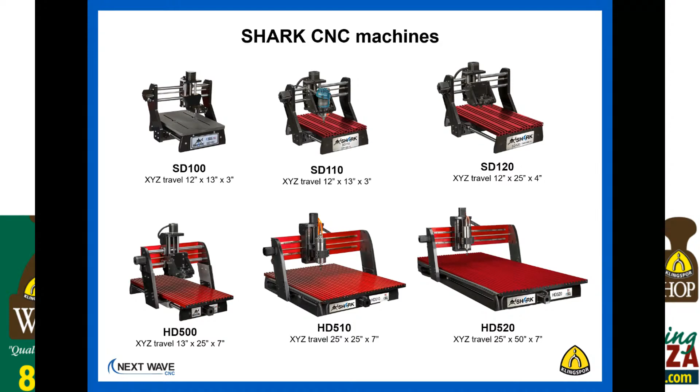That's one number you do want to pay close attention to, because especially if you start getting into cutting things like 8/4 material, you need room for your router bit and the material to fit underneath. And then, of course, if you have what's called a spoil board or a board underneath your work, so you don't cut into the metal bed, you need additional space for that. So just a little bit of advice there.

When you're out shopping, make sure you get something with, I'd say at a minimum, 4 inches if you're looking at a larger tool. For the smaller tools, 3 or 4 inches works okay, because typically you're just doing some small sign cutting right on the bed. I've actually worked with people who run a very small machine because all they're doing is small parts, maybe little coasters or handles or something like that. Surprisingly, the small machine performs well for them. But as soon as you start getting into cutting plywood parts or larger parts, obviously a larger machine makes sense.

So this is something I like to give to people who are looking for a machine, or new owners, just an overview of the basic anatomy of the machine. CNCs, the kind that most of us are going to be familiar with, are referred to as a 3-axis CNC, because there are 3 directions of movement, as spelled out here. So when you get into CNC, you're going to see a lot of references to X, Y, Z. You get very familiar with those movement directions.

The Z is common on all machines; that is the spindle or router movement. Whereas the X and Y, it depends on the machine manufacturer—there's not a standard layout for that. So in the machine you see here, the Shark 510, the Y is the forward-to-back movement, where the X is the left and right. But again, that depends on how the manufacturer decides to lay that out.

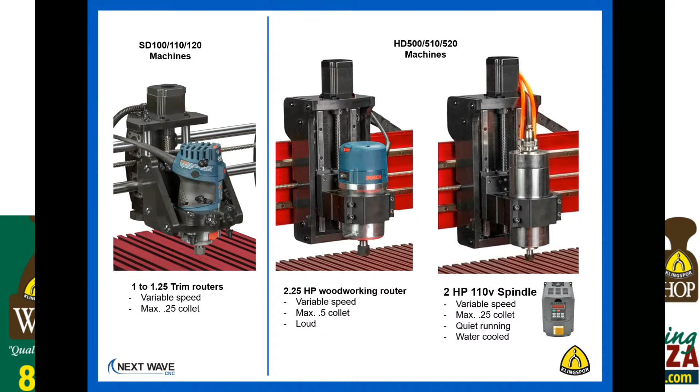With Next Wave's Shark machines, and many other machines on the market, you have the option of running your machine with a PC or with a pendant. The Shark machines offer both options, and each has certain advantages. The pendant is incredibly handy because you hold it in your hand and have all the essential functions there. I probably use that 80% of the time.

The computer control option, because you're controlling it directly with the computer, gives you a bit more brain power, so to speak, and lets you do a few more things. But the downside is you're taking your PC or computer into the shop, where it's dusty, so some people don't like to do that.

Just a quick side note, most CNCs can be run with either a PC or a Mac. However, if you run a Mac, you have to get another program often referred to as a virtual desktop—one brand is called Parallels—which allows you to run Windows and Windows-based programs on your Mac. I run both and have had great success running my Mac or the PC with my machine. So if you're a Mac user, there are definitely options out there, and if you want more information, just drop me an email and I'll send you a link on how to set that up.

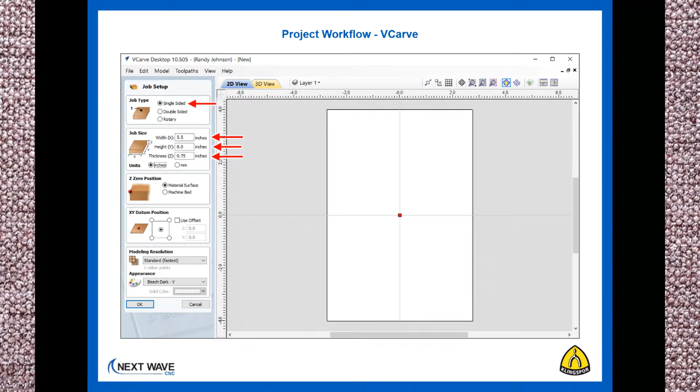Some of the important settings involve how you calibrate your machine. You heard me mention the Z movement—that has to do with the bit cutting into the wood. One of the settings in V-Carve is referred to as the Z0 position, because you have to coordinate or calibrate your machine with what you have in your software program. In this case, we're setting this up so the router bit will calibrate itself to the top of the material, which is called the Z0 position.

Next, you also have to calibrate the XY axes, referred to as the XY datum position or the XY0 position. For this project, we're going to select the middle of the material, but you could select any of the four corners or other locations as well. The middle is a very simple place to start out. Simply click OK, and your initial setups are done.

Again, a quick overview of what V-Carve looks like for those of you who are brand new to CNC or considering it. V-Carve basically has three areas you have to be concerned about: the left area, which is your design area; the right area, which is your toolpath area; and the middle area, which is your project drawing or setup area. There are some other aspects to that, but those are the broad areas you're going to be working in when you're starting out.

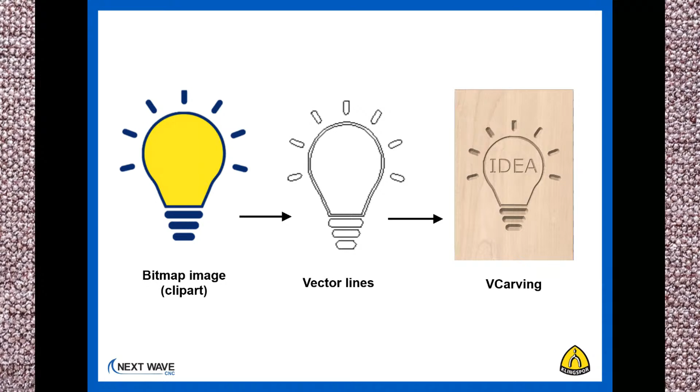For this project, I'm going to start out with a bitmap image or clip art. It's simply a photograph or a drawing that you have on your computer, which you can get off the internet in lots of ways. The CNC, or V-Carve, can't cut directly from that bitmap image. You need to convert it to what are called vector lines, which is the kind of line that allows the tool bit and the tool path to follow to do the cutting. Then from there, you're able to save out your actual tool path and do the actual cutting on the machine.

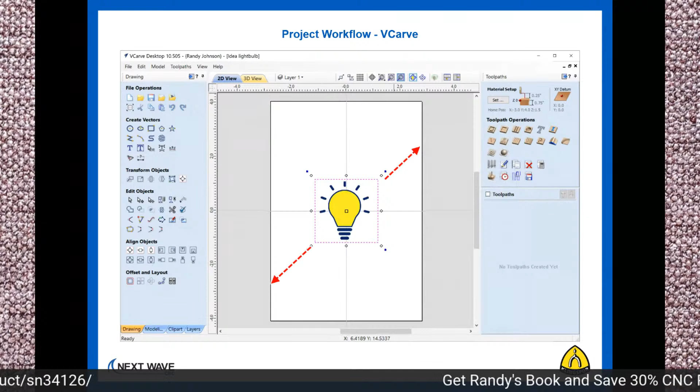So again, for this one, we're going to use that little import function. I'm going to go back to the routine of importing the light bulb image from our computer using the import function in V-Carve. When you bring it in, you can stretch out that image to whatever size you want to fit your drawing area. Then, as I mentioned, there's a tool called Trace Bitmap. When you bring that up, it will automatically recognize the image. You can see that this image is made up of two colors primarily, the blue and the yellow.

It's the blue color that I'm most interested in, so by checking that box, it highlights the blue color in what's called the trace color — that's red now, and it's the red color that's going to be traced as we go forward. At the bottom, you could click preview, and you can see where it's actually inserted the vector lines around that.

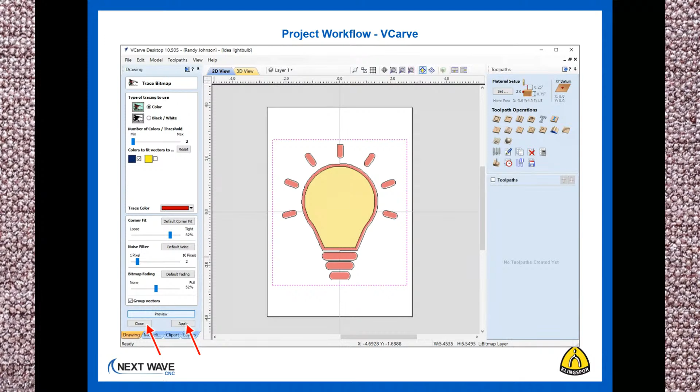And then you can simply apply and close that and go back to your main screen. Now in the main screen we've got our vector lines and our image, but we don't need that image any longer. So all we have to do is go into layers, which you can think of like transparent pieces of paper, and hide that drawing. So all that's left are the black and white lines.

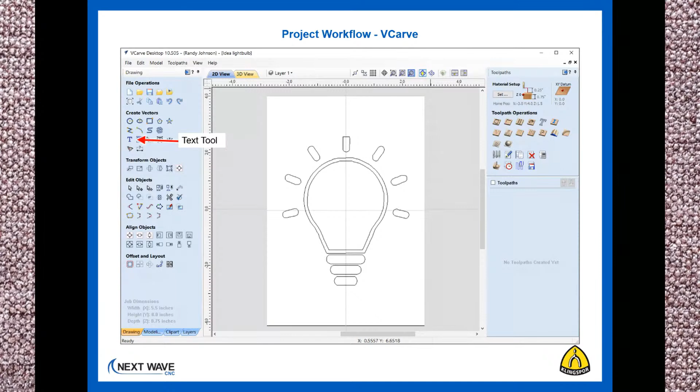Once we have that, if you want to add some texture drawing, there's a text tool where you can go in and add some text. You could select your font, your alignment, the size of it. You've got lots of options. It's kind of like a mini word processor for adding the text into your cutting area.

Once that's done, we have a simple set of vector lines. Move over to the V-carve, or the toolpath side of it as I mentioned earlier. For this setup, the toolpath operations are like a lot of different tools in your shop — you've got a sander, a drill press, a bandsaw, a jointer, a planer, a molder. Each of these toolpaths functions like a separate tool in your shop, so each one has a certain application.

Some of these we're going to look at before we set up our light bulb. These are probably the five I find most common to use when starting out. You've got the two at the top called profile and pocket, the one in the middle called V-carving, and the two below that for 3D carving.

The profile and the pocket — you can think of one like a bandsaw and the other sort of like a mortising tool or a handheld router for pocketing things out. These are just a couple of the applications of how you could use those tools.

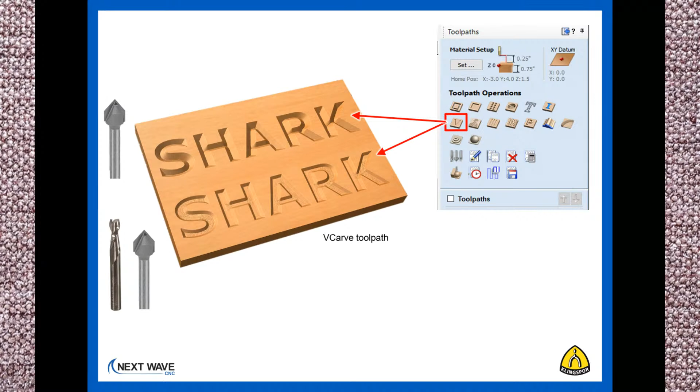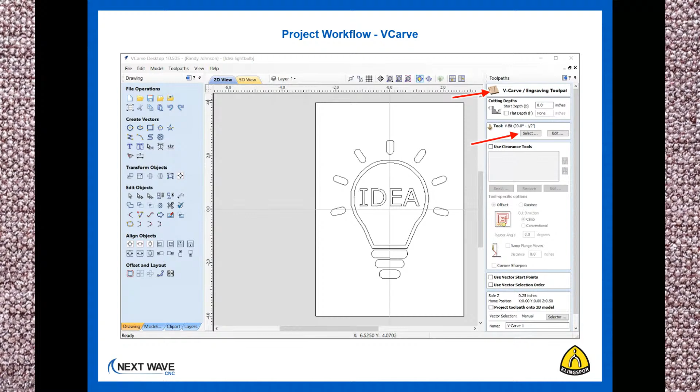So back to the light bulb — we're going to use V-carve for this. We open it up, and on the right side an editing window pops up for this particular toolpath. This is where the information gets a little deep, and it takes time to learn how to use V-carve because there are lots of settings here. I'm going to hit the high points but give you enough information for a good overview if you're getting started in CNC.

Once we open up the V-carve specific toolpath, we then hit the select button, which opens up what's referred to as the tool database.

You can think of this as your library of tools, and you can customize this to include just the tools you actually have in your shop. There's lots of settings here to think about, which we'll go over briefly. But the first thing, of course, is just which bit you have.

One of the big settings you have to think about is how deep it's going to cut every time it does some cutting. It's called pass depth. You can think of it as taking off material in layers, and that determines how aggressive your cutting is.

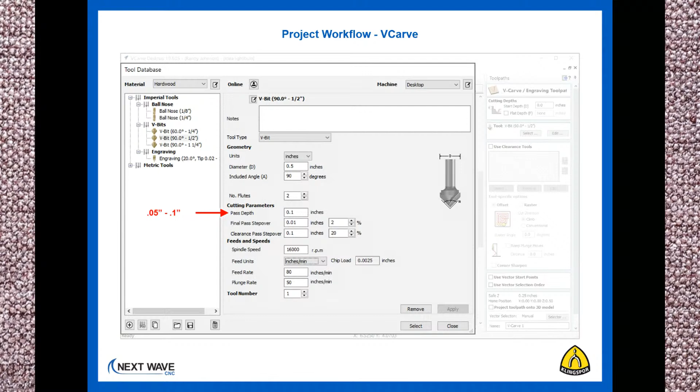With V-Carve, you have a couple of special settings relative to what's called final pass step over and clearance pass step over. You can think of these a little like a roughing pass, as you see in the lower right, and then a finishing pass, as you see in the upper right. The clearance pass actually roughs it out with a very large step over, and then the final pass goes back and cleans everything up. What I have found is the 2 and 20% settings work really well for most setups.

Next up, you've got to set up some feed rates, and the feed rates I've specified here work well for most Shark CNCs. It depends on what kind of machine you have as far as how aggressive you're going to be with these settings, so I always encourage people to do some testing. But if you're a Shark owner or have other small desktop CNC machines, this 50 to 180 inch per minute range works. The smaller your machine, typically the slower you're going to go.

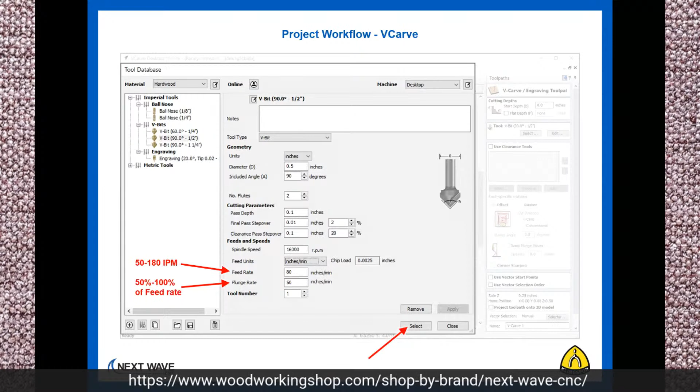The larger your machine, the faster you're going to be able to go. Personally, I've got 3 machines in my shop and 1 in another shop, so I've got 4 different brands of machines that I often work with. But on the Shark 510 I currently have, I actually find that I'm operating up in the mid hundreds, even the upper 180 inch per minute sometimes, because that HD5 is stout enough to take that kind of rapid movement.

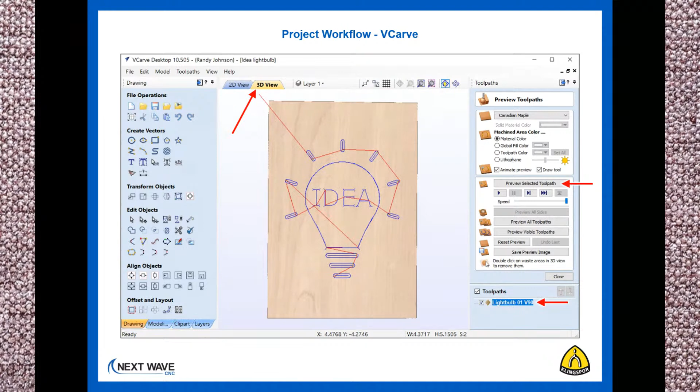There are some settings involved with that which help it be efficient, and as you get into VCarve, you'll learn more about that. You can also preview it in VCarve, and it shows you a preview of what the cutting looks like.

Vectric has worked really hard to make this preview function accurate, and I would say 99.9% of the time, what you see here is exactly what you're going to get on your wood. So if anything in this preview doesn't look right, down to the fact that if the bottom of your cut looks rough, it's probably going to be rough on your final project.

So it's really important to make use of this preview, it's a chance to avoid mistakes. If something doesn't look right, either go back to your drawing or go back to your tool path, or go back to both of them and figure out what doesn't look right.

I can't hardly keep track of the number of times I've been contacted by somebody who shows me their project that they were starting out with, and the cutting went all crazy. I go back and preview it, and it looks crazy in their preview, and they had failed to pay attention to this window. So this is a critical window before you go to your machine to double check that your settings are all correct.

There's a little process within VCarve where you're going to save out or post-process your file. Within the VCarve setup, depending on which machine you have, you'll select the correct post-processor. In this case, it's a Next Wave CNC post-processor. The good news is once you select this the first time, it will default to that afterward, so it'll be ready for you next time.

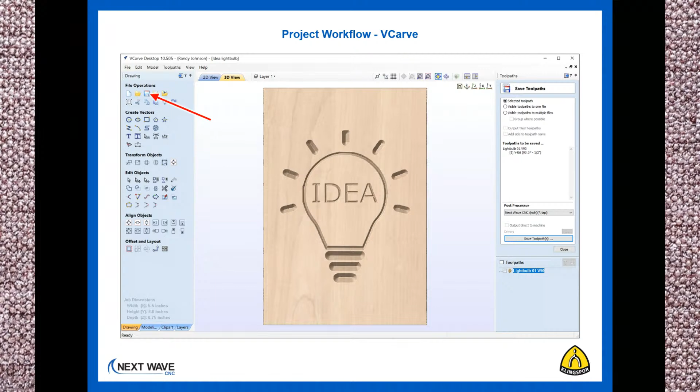The other file we just saved out, your TAP file, is a different kind of file. That's the machining file that you're going to take to your machine. If you look at the two, you can tell the difference based on their names. The design file is the file you want to protect because if you lose it, you'll have to start over. The TAP file can always be regenerated from the design file, so in a way it's a throwaway file. In fact, if I go back to cut something I cut three months ago, I'll always regenerate the TAP files to make sure they're up to date and doing what I want.

So the TAP file is typically what you will put on your thumb drive. I will not typically put my CRV file on the thumb drive because thumb drives break, they get lost, and I don't want to lose my master file.

Back to the workflow chart, this shows you once again how the TAP file or the G-code file fits into the big picture. As I mentioned earlier, you could bring that G-code file into what's called Ready2Control, which is the computer panel that hooks up to the CNC, or the pendant. With the Shark products, they both can be hooked up to the machine at the same time. So if you have a Shark product or are considering one, you can have both the computer and the pendant hooked up to the machine simultaneously.

You will have to toggle between which one is controlling it, and if you use one, it will lock the other one out, so there's a safety feature there. Whether you bring your computer into your shop or not is your preference, depending on what you're trying to do. The computer hooks up with a USB cable directly to the machine, and the pendant hooks up with a special pendant cable. If you're using the pendant, you bring your USB drive with your TAP file to it, but they both deliver the same kind of information to the machine.

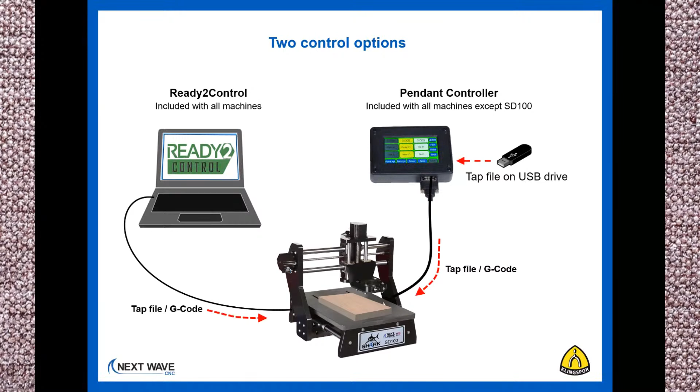Part of the prep at your machine is setting up the XY data, or the XY zero position, on your project. If we look back at our VCarve file, we see that we set it up at the middle. So a simple way to do that is draw an X in the middle of your material to designate that as the middle of the board for zeroing out the machine.

So lots of times when I set up a machine for myself or for someone else, I'll either use a pencil, or in this case I actually use some blue masking tape, and I just mask out the area to show the actual cutting area.

So that means I need to keep the board or my cutting within that area. Now I can use the back half of the table as overrun or for clamping purposes, but I just won't be able to do any cutting on the back half. So I need to stay in the front half.

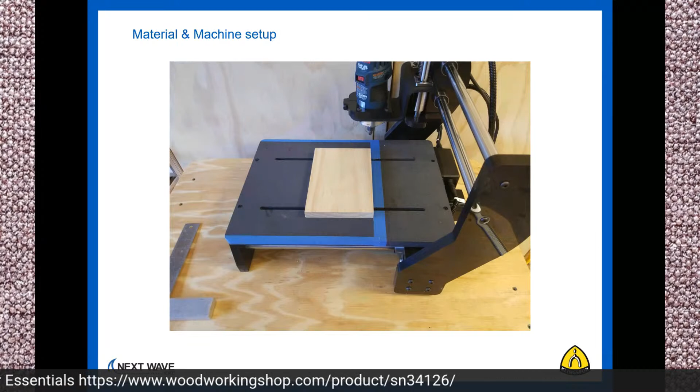On this particular tool, which is a SD100 from Shark, there's no tape on the front because this tool actually overhangs the front by about an inch, which for those who want to do end machining actually allows for that. Some people have set up jigging to do different kinds of end machining off the tool. That's possible on this machine because the drive motor for the Y-axis is mounted to the back of the machine. This isn't common on a lot of tools, so a lot of CNCs aren't able to reach it. I've done a little bit of front end machining personally, but most of the time it's still flat machining on top.

Clamping, in this case, I'm going to rotate my board around and line it up with the slots of the table. Somehow you want to come up with some way to simply get your board oriented so it's square to the movement of the machine. In this case, lining it up either with the tape or with the slots of the table works fine. I'm also using some simple hold down clamps.

On a couple of my other machines, I use other techniques. I'll either use screws if I have a spoil board, which I like to use a lot, or I have some low profile clamps. The clamps with the knobs are convenient, especially for this setup, but sometimes depending on how you're orienting your material, the knobs can get in the way. So I'm very pragmatic when I tell people about hold down. Just use what works.

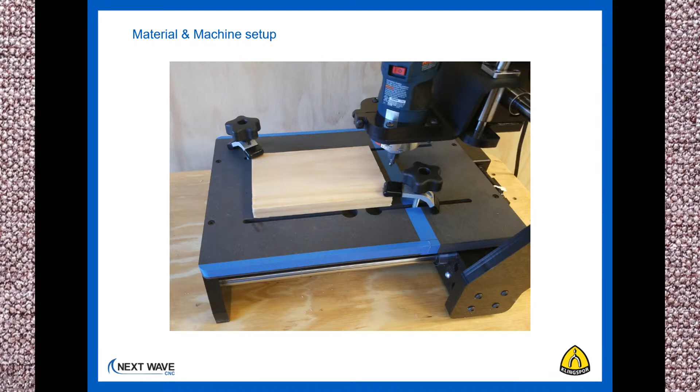The next part we're going to set up for this project is we're going to move the Z all the way to the top of the axis to give us room to put the router bit in. Depending on what your machine is like, in this case the Shark pendant lets you just push the up key to conveniently move it all the way to the top and then insert the router bit.

Now, it's always recommended not to shove your router bit all the way up into the collet. Leave a little bit of space, at least a 1/16 of an inch, so that you don't have that curved shoulder of a V-bit up inside the collet, because it would prevent proper clamping. On a straight bit, you also don't want the flutes or cutting edge up into the collet either.

Now, the opposite is also true. Don't have a whole lot of bit hanging out. Some bits actually have the recommended insertion marked on them, but it's usually about an inch. I've seen some customers trying to get more reach out of their router bit, sticking it up so only about a 1/2 inch is inserted. And that's going to cause a problem. It's going to cause wear and tear on the bearings, possibly cause more chatter, and you may more easily break the bit. It's just not a safe and practical setup.

So if you need more depth, preferably find a longer bit. But don't extend it too far, because that will also cause as many problems as sticking it up too far inside the collet.

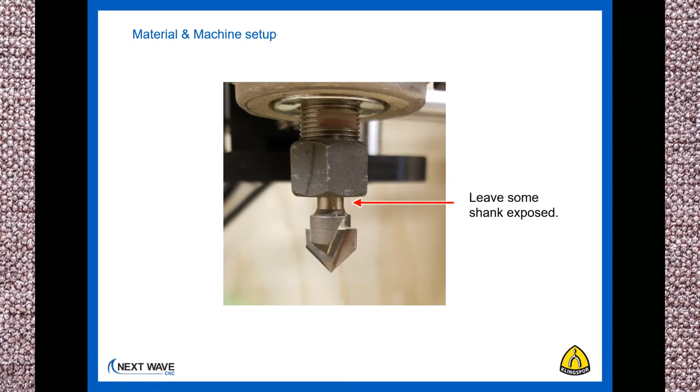The next step is a very basic, simple setup for calibrating or zeroing out the X, Y, Z for the machine, because we want the machine to be coordinated the same way the VCarve file was set up.

We're going to use the positioning buttons to move the bit over our XY datum point, then use the up and down buttons with a little piece of paper, jogging the router bit down till it just drags on the paper. This is a manual way of doing it, but it's quite accurate and requires no other accessories.

Now that I'm down over my paper and over the XY datum location, for this pendant setup for Shark, I simply push the Zero XYZ button, and it automatically zeroes out all 3 axes, shown at the top of the pendant. So they are now calibrated for this piece of material and the file we're going to cut.

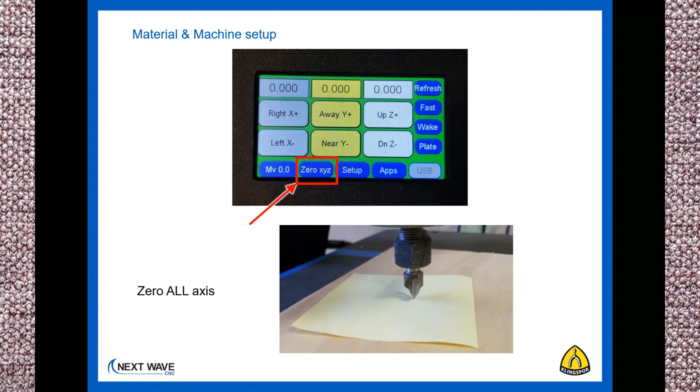Next up, you want to move that router bit back off the table a little bit just to give it some clearance before you start it up.

One of the accessories most CNC people either have or add to the machine is called a Z-zeroing touch plate. It's a little electronic device where you put a wire or magnet on the collet, and it connects with the plate to create a signal telling you when it's touched. The controller knows how thick the plate is, so it allows for that thickness and automatically calibrates it to the surface of the material.

Depending on how precise you're working, sometimes you may find the paper to be a better option. So I use both, and it just depends on the projects I'm working on.

One thing to consider is that once you have your X, Y, Z all zeroed out and you run a program, when you need to change a bit, you have to re-zero the Z. You don't necessarily have to re-zero the XY, because if you haven't turned your machine off, it'll remember that position. But you do have to re-zero the Z every time you put a new bit in.

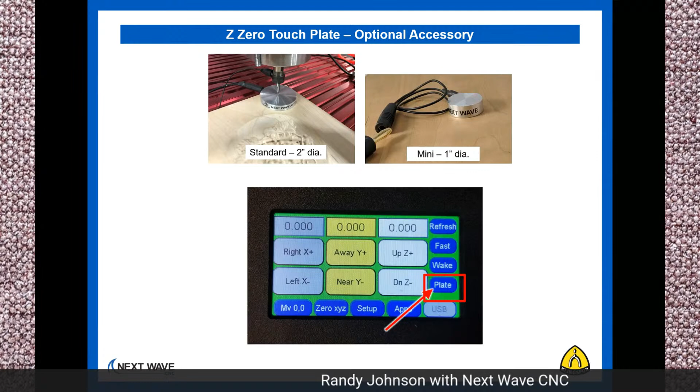As you can see in the top upper left picture, I'm actually zeroing off the corner of this project because the initial carving in the middle carved away the location of the original XYZ datum. But since my XY is already saved, I just need to do the Z up there on the left.

With most control software, there is a routine for doing the zero plate that walks you through several steps to automate that process. On the Shark pendant, it's called the plate application for zeroing it out.

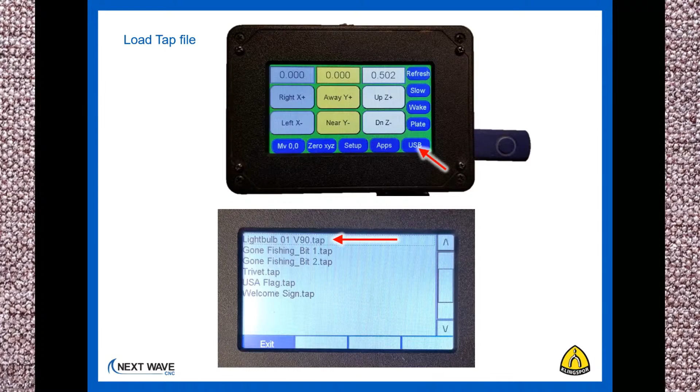So we're now ready to actually bring up our file. We've inserted the thumb drive, then you click on the USB button to view the file. In this case we're looking for our light bulb file, which you can see at the top of the list. Selecting that opens up a preview screen.

The top screen has what's called header information, giving you a summary of your V-carve settings. It's a good chance to verify that what you're doing at your machine matches your V-carve setup, especially if your computer's back in the office and you don't remember your settings exactly.

For instance, it shows the material size, giving you the size of the board you set up. It gives your Z origin, which in this case is material surface, and your XY origin, which is the center. If you push the down button, you can look at additional information showing which router bit you've selected and the names of the tool paths used, along with other information.

Further down is the G-code for the file, and you can preview it, but you can't edit it here. So it's pretty much just for preview purposes.

But this top part, whatever machine you're using, whether you're using a computer control window or a pendant to run your machine, taking a quick look at this preview information is another step to avoid mistakes, to make sure you've selected the right bit, the right material, the right zeroing locations.

Once you've verified that, you click on the next button, and that'll take you to the start screen. There you see the name of the file again, another chance for you to verify that you've selected the right file.

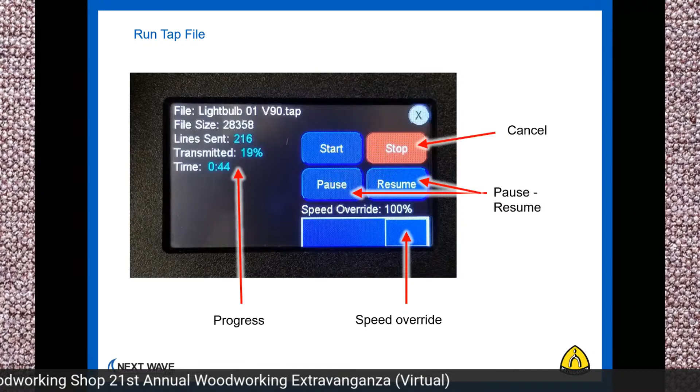The run screen on the Shark pendant has some features that are common on lots of controllers. You've got a stop button, which is a cancel button, sort of like an emergency switch. If you push the stop button, everything stops in your machine, which may be what you need to do, but it also cancels all the operations and you have to start over from the beginning again. It doesn't allow you to pick up halfway through because this is an emergency type of stopping situation.

If you want to just pause it for a moment to get a scrap of wood or readjust a clamp or something, you can click the pause button and that will pause the cutting action, and then you can click resume. At the bottom, you also have a speed override.

So if while you're cutting you suddenly realize you're being too aggressive, you can back that off to 80% or 50% to run the rest of the file. If you find yourself having to override the speed a lot, I recommend you go back to your V-carve file and reset the speeds, because it's better to do it there than to override it here. But again, this is a kind of last-ditch effort to prevent your cutting from being too aggressive.

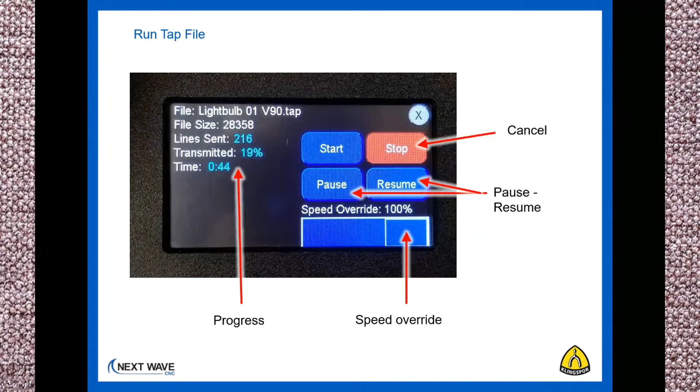On the left side, you'll see some information on transmitted time as well as total time. And when it's all done, it'll give you a total number of the actual run time of how long it took to cut the file.

So I mentioned at the beginning you could either use a spindle or a router, depending on the tool setup. But if you're using a router, like the Colt router, or even a full-size woodworking router, I often recommend setting it at somewhere around 70 to 90% of the speed rather than full speed. It has all the advantages you see listed here, but particularly for a woodworking router, those routers often run in the 25, 30,000 RPM range, which is often too fast for most router bits on small desktop type CNCs.

When I say too fast, if you've ever routed a board by hand and you move kind of slow, you know how you can burn the wood, and basically you're creating a lot of little chips. Well, a similar thing happens with the CNC — you end up creating a lot of sawdust rather than nice chips coming off of it. And that heat, not only do you risk burning your project, but you also can prematurely wear out your router bit.

So turning down the speed a little bit — there's a lot that goes into choosing feeds and speeds, and I do a whole webinar and workshop just on choosing feeds and speeds for your type of material, as well as the machine, whether it's a large machine or small machine. But the simple fact is you want to typically slow down your woodworking router, and even on the spindle, I rarely run it at full speed.

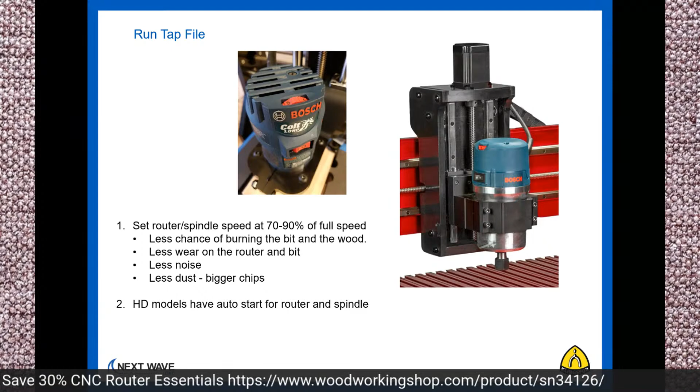One of the advantages of the HD models, and this is true of many CNCs out there, is that it has an auto start for the router, and it also auto starts the spindle, which is actually a feature you find in much bigger tools. It'll auto start the spindle and turn it off, and also auto control the speed settings, which is really nice because you just stick your thumb drive in, run your file, and those features are all automatic.

Next Wave also, because it's a water-cooled spindle, has an auxiliary input into the control box that allows you to plug your water pump in there, so it actually turns the water pump on and off at the same time it turns the spindle on and off. So it's all fully automated — no need to leave your water pump turned on all the time or forget about turning it on.

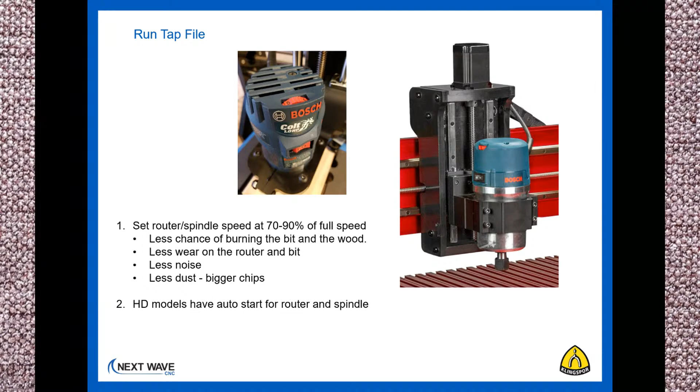So when you're ready to go, you hit the start button and let it do its work. Again, this is a very quick file. The V-carved toolpath leaves a nice decorative V cutting. You can see surrounding it those little tiny chips. We'll call those sawdust, but it's not actually dust. Those are little shavings, and that's actually what you want to see coming off of your project.

Just a couple of quick tips before we wrap up here. One is go with as short a bit as possible. One reason is it'll reduce chatter, it's less expensive, and you're wasting flute edge if you're not cutting with it. Straight bits in particular come in different lengths, and I've got three different lengths I use, from very short, maybe half-inch lengths, all the way up to some that are 1.5 or 2 inches in cutting length. It all depends on what I'm cutting, but generally go with a shorter bit if possible.

Next up, when you're setting up your machine, to give yourself the most reach, depending on which machine you have, lower the router or spindle down so it's about 3/4 of an inch off the bed or your cutting surface. That way, whatever bit you put in there will have the ability to reach all the way down. Every so often, somebody will contact me and say, hey, my bit's not cutting to the bottom, and they've got their router set up too high inside their router mount. Or the opposite, they've got it set too low, so either they cut into their bed or their Z mount tops out at the top and throws off their settings. So if you set it up like I have here, somewhere between 1/2 and 1 inch, the main thing is you want your bit to be able to reach that.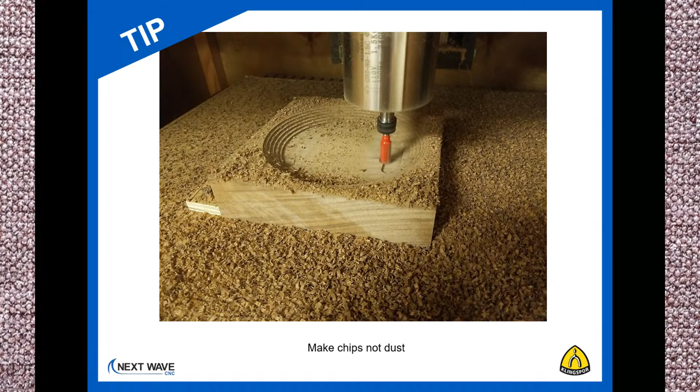So with that, I'm glad to open it up to questions, if anybody has any questions.

Don't see any live, but always remember these have a little bit of a delay on them, so questions could be rolling in a few minutes. That's fine, I'll stay online, so if any questions come in, either shoot them to me, or you should be able to see them in the comments section on the right-hand side of the screen. Okay, I'll watch for those as well. Yeah, we also get quite a few questions after the fact. Since this will be posted as a stationary video once the live is over, we frequently get comments then, so we might get a comment on that two weeks from now.

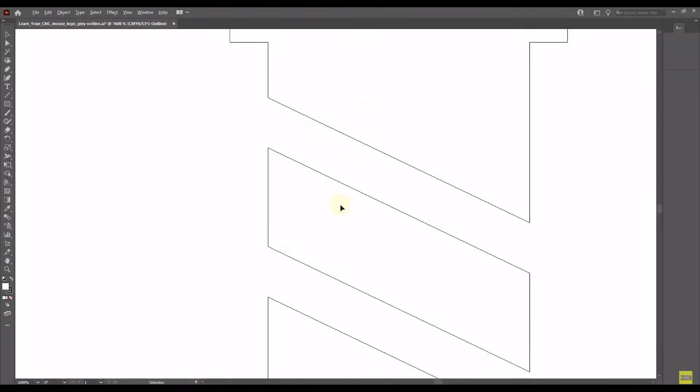Now let's go to the vector file, which will be the Adobe Illustrator file. I'll open that up, and you can see if I zoom in on this one, this is not pixel based, this is vector based. Any of these lines are actually nice straight lines because they are vectors, and you can see I can actually turn these into lines within the program here. These are nice, solid vector lines that will import very nicely and cut very nicely.

So basically what I'm saying here is the vector files are going to be the best source to import if you have a vector file available, but you may only have an image file and not a vector file available. So I'm going to show you inside of Vectric the differences between importing a vector file and importing a bitmap file. So here we are back in Aspire, and we're going to first look at the vector file.

So we're going to go to Import Vectors, and we're going to open up the file that we just looked at, and you could see that will import right away as vector files. You can see each line as individual, and these are pretty much ready to cut right away. You should not need to do too much to this unless you wanted to customize it in some way, or sometimes you may have to clean it up some. But in this case, this one's already pretty clean, so this would be all ready to go and create the toolpath, although you'd want to size and position it first as well.

And you can also see when you import it, it'll go on a separate layer, and it's now on this import layer, which is just the file name that you imported it from. Okay, so I'm going to undo that. So now we're back to a blank screen, and this time we're going to look at importing the picture.

So for that, you would go to Import Bitmap and select the image that way, or like I mentioned earlier, you can open up your file folder, select the image you want to import, and then just drag and drop, and then it'll import it right away. Now we go into Aspire, and now you can move this around anywhere you want, as well as size and position it.

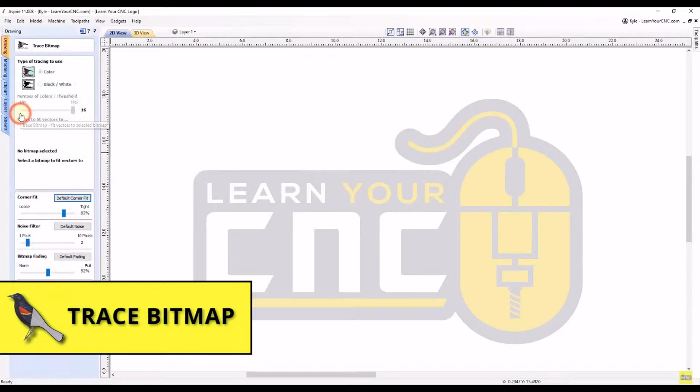You can manually trace all these lines, but you can see that will take some time to do all of this. So Vectric has a handy tool here called Trace Bitmap. And you can see it says no bitmap selected, so first we have to select our image.

With our image selected, we have two different options here. We can do color or we can do black and white. In this particular case, either will work. You can adjust this up and down for minimum and maximum threshold, and you can see when you move it up, you will lose some of the colors, and when you move it down, you may also lose even more of the colors. So you want to get it somewhere in the middle there where you could see everything that you want to trace. So that is the black and white option.

If you go to the color option, this will choose colors that are inside of this file, which you can see there's mainly 3 different colors, the white, yellow, and gray. So you can adjust this number of colors down to 3 if you wanted to, and that will get the main 3 colors there, gray, yellow, and white.

And you can select a color. Let's say we selected yellow, and you'll see it'll highlight in red here, letting us know that's only what it's going to trace. So you can trace just the particular color that you want to trace. Another thing you could do is, if we deselect that one, you can actually choose right on the screen the color you want to trace. So if we wanted to trace the white color, we can click on that, and you'll see that will highlight in red, letting us know it's only going to trace the white colors.

And for this particular file, we're actually going to trace the gray color. So let's click on that. We actually have to deselect the white color that we selected earlier. Okay, so now you can see the gray color is highlighted in red, letting us know it's going to trace all of this highlighted in red.

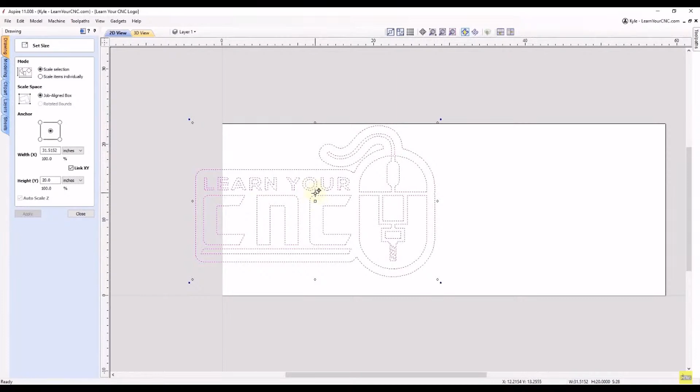The width automatically adjusted to 31.5 inches to keep the proportions correct to the original design. Since we anchored from the center, this center point is still the exact same center point it was before. You can see we can click here and move it to the right if we wanted to get it inside of our material, but we're actually going to use the move tool to position it exactly where we want it. So we're going to click close on the scale tool.

Now we're going to go to the move tool, and that is the first one here in transform objects. The keyboard shortcut to get to this is the letter M, M for move. If you type that in, that'll open up this tool as well.

Now we can set our anchor position and our absolute position inside of our material. Let's say we wanted it 1 inch from the bottom and 1 inch from the left. We're going to anchor our position down here in the lower left—that's going to reference off this lower left corner of the bounding box of this shape, so that'll be this little dot down here. We're going to go to the absolute position, which is the absolute position within the rulers on the top and the side, and we're going to type in 1 inch for the X and 1 inch for the Y, and click apply.

And you can see that will now move our shape. Now this lower left white dot, one of the little handles, is in the exact position: 1 inch from the left and 1 inch from the bottom. So that is how you can set the exact position of your design.

Once we have that set up, we're going to click close. Now we're basically ready for everything we need to create our toolpaths. We have our 2D vectors ready to go, sized correctly, and positioned correctly. After we visualize the toolpaths, we're going to rotate this 90 degrees to make the longer measurement the height, which is the Y axis.

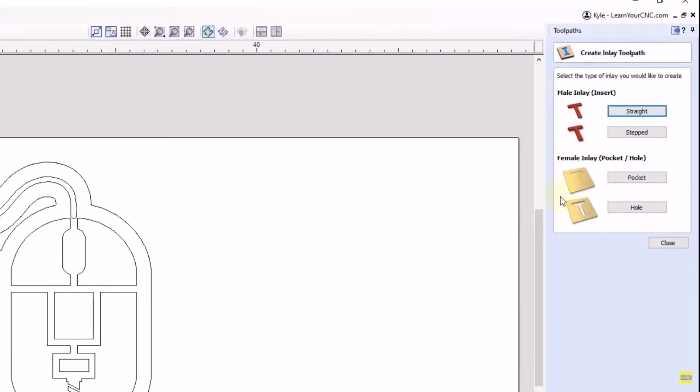So we're going to go down to the female inlay and select pocket. Next, we're going to determine the cutting depths. This first one here is the start depth. Now we're starting right at the surface of the material, so we're going to leave this at 0. That will reference all of our depths from the surface of our material.

Next we need to determine the cut depth, so we're going to adjust this. This is how deep our pocket is cut into the material. Let's say we go 0.125 — that'll be 1/8 of an inch deep. That should be pretty good for this particular project. So now we have our cut depth.

Next, we need to know what tool or multiple tools we want to use to carve this pocket. Some of these areas are going to be fairly large, so you may want to use a larger tool. But you need to be careful because the larger tool may not fit into the smaller areas. However, you can select multiple tools — larger tools to clear out the bigger areas, and smaller tools to fit the areas the larger tool cannot. But keep in mind that the smallest tool you go down to in the female inlay is the tool you need to use to cut out the male inlay pieces. So be careful of how small a tool you select in this toolpath.

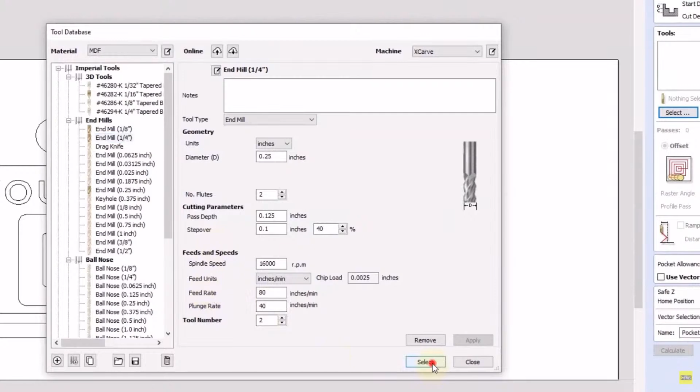To select a tool, we're going to go down here to select, and that's going to open up our tool database. We're going to come down here and select our 1/4 inch end mill. Now, everybody's settings are going to be different for the feeds and speeds, so we're not going to get into that in this lesson. But if you check with your bit manufacturer, you should be able to find the recommended feeds and speeds for that particular tool. Okay, so let's select this one, and you'll see it'll place it in the list here, the 1/4 inch end mill.

With this tool selected, we can come down here and specify the strategy we want to cut. We can either do offset, which starts in the middle and works its way out, or we can go to raster, which goes at whatever angle you set in a zigzag pattern. Now we're carving MDF, so it doesn't really matter the direction we cut, and I generally use the offset strategy anyway for a pocket type of toolpath. So this is the one I'm going to use.

With our strategy selected, we come down here and we have an option to ramp the plunge moves. If you do not turn this option on, it'll take your tool and plunge straight down into your pocket and start cutting away.

If you turn this option on by checking this box and setting a distance here, I typically go double the distance of the diameter of the tool. So we have a 1/4 inch end mill, which means a 1/2 inch distance. That'll make it come in at about a 45-degree angle, so instead of plunging straight into your material, it'll come in at a slight ramp. That puts a little less stress on the tool as it enters the material. You don't have to use this option, but it does help your tool as it enters into the material.

The next option we have is pocket allowance. I always start at 0 for this, and only adjust this number if my parts are too tight or too loose. So we'll start at 0, cut this, and test fit our pieces. If they're too tight or too loose, we can adjust that number and recut it. But if you're using an expensive piece of material, or one you only have one of, I'd recommend trying this out first on a scrap piece. It doesn't really matter which material you use, as long as you use the same tool you plan on cutting the final piece with. That way you can figure out your pocket allowance without messing up an expensive piece of material.

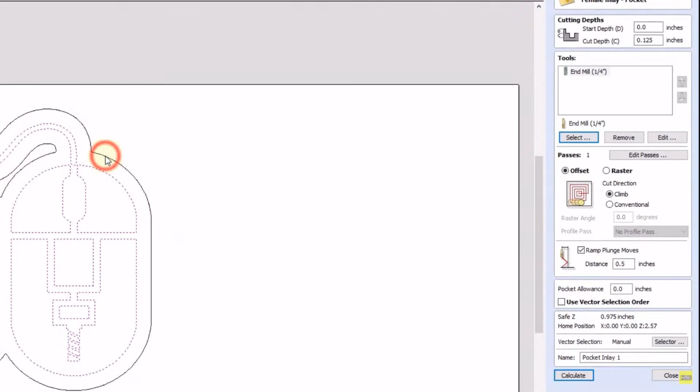Okay, so now we have this all set up. We're going to select our vectors that we want to cut. I'll draw a selection box around everything to select it all, but I don't want that outside line, so I'll hold the shift key and click on that line to deselect it. Now all the shapes on the inside are selected and are going to be the only ones carved with this toolpath.

And then down here we can give it a name. So I'm going to do pocket inlay, 1/4 inch end mill — I'll call it female pocket inlay. And then we're going to click calculate.

You can see that created a toolpath for this, so we can do preview selected toolpath. You can see that carved away all of the material in there. But down here in the detailed areas, it did not carve because the tool is too large to fit in there. If we turn on the toolpath, you can see these lines are where the toolpath is going to travel, and you can see it did not travel in between these slots. That means we either have to adjust our design for the tool to fit in there, or select a smaller tool.

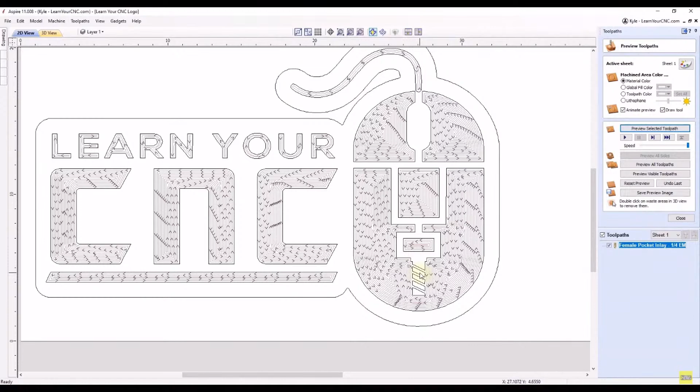So what I'm going to do in this case is add an additional end mill to this toolpath. To do that, we have to edit this toolpath — double click on it and that'll open it up again. Then all we have to do is go to select here for a tool, select an 1/8 inch end mill, confirm all your settings, and click select. Now you can see we have 2 tools in here. The 1/4 inch end mill is going to cut most of the material first, and then the 1/8 inch end mill is going to come back and clean up the edges and anywhere the 1/4 inch end mill could not fit.

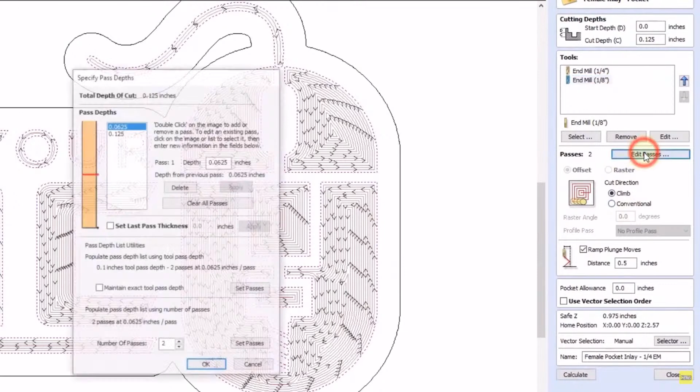Down here you can see different settings for each tool. The 1/8 inch end mill isn't going to allow us to select a strategy, since this tool is only cutting the edges, not anywhere in the middle. But one thing I am going to change is the number of passes. Right now it's set up to cut in 2 different passes, and we're only cutting 1/8 inch deep, with this end mill only cutting along the edges. So I'm going to go to edit passes — that brings up this form, and we can do clear all passes. Now it's going to do a pass depth of 1/8 of an inch, so I'll click OK. Now the number of passes is down to 1.

And that's going to cut our cutting time in half. So now instead of going around twice, it's only going to go around once. But just make sure your tool and machine could handle that depth of cut in one pass.

Okay, so now with this new tool added, we're going to click calculate again, and that's going to recalculate that toolpath. Now if we zoom in, you can see already we have a toolpath going in these lines here. So let's zoom out and reset our preview.

And you can see now we have two different toolpaths here. The first one is the 1/4" end mill, cutting out the bulk of the material. The second one is the 1/8" end mill, and that's going around all the edges and also getting between these lines here where the 1/4" end mill could not fit.

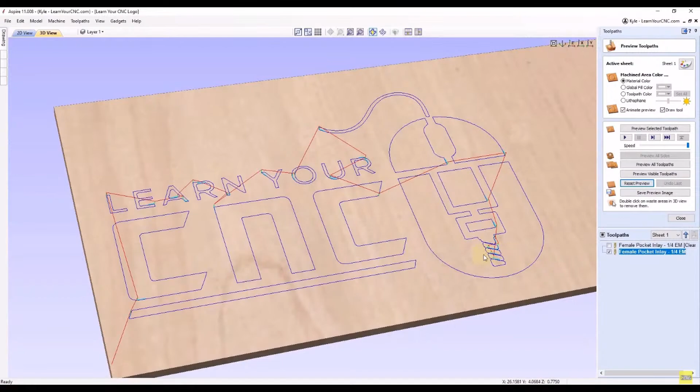But you can also see it took the same name for both toolpaths. So we have 1/4" end mill on this one and 1/4" end mill on this one, but this one's actually carving with the 1/8" end mill. So we're going to right click on that one, go down to rename, and change this to 1/8" end mill, and then deselect it. Now it's named appropriately for that toolpath.

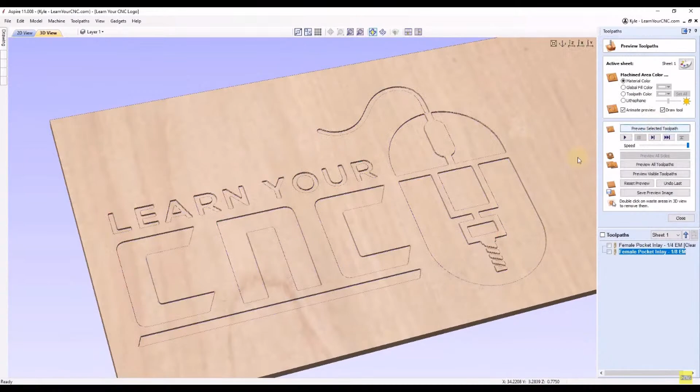All right, so let's preview the 1/4" first. We're going to select that one and click preview selected. You can see it looks pretty similar to the way it did before. Now we're going to select the second one here and click preview selected, and you can see that one came back and cleaned up these areas that the 1/4" couldn't fit.

It also went around all the edges to make the corners a little bit sharper with the smaller tool. So let's look at the 2D view. We're going to go to our 2D view, and let's turn on these toolpaths.

Right now we are looking at the wireframe view of these toolpaths. This is the center line of where the toolpath is traveling. So we're going to look at the solid view by going up to the top here, and there's a button that toggles on the solid view.

And now all these purple areas are going to be areas that are going to be carved by these toolpaths that are turned on. So if we zoom in, say on these letters, you can see we have a sharper corner here for the letter, but the toolpath cannot get into those sharp corners because the tool is round and it could not carve a sharp corner like that.

But you can also see these corners on the inside here, it's actually cutting those away. The reason it's doing that is because when we go to cut the male part, we're not going to be able to get into that sharp corner. So this inlay toolpath is going to automatically carve away these corners to allow a perfect fit of these pieces after we cut them out with the male inlay toolpath.

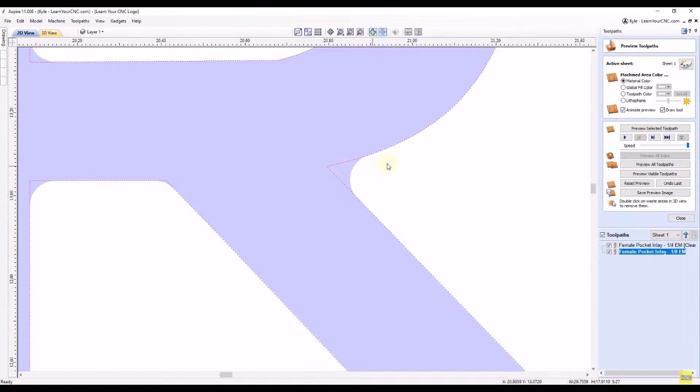So that is the difference between a regular pocket toolpath and an inlay pocket toolpath: it will cut these corners away to allow parts to fit in there without having to chisel the corners or do any adjustments to the pieces. But just keep in mind your pieces will have a little bit of a radius corner, and the smaller tool you use, the smaller this radius will be.

So we're using an 1/8" tool, so this would be a 1/16" radius corners. That wouldn't be too bad in this particular case, because when you zoom out, you can see you'll barely even notice those little radius corners.

Okay, so now our inlay pocket toolpath is created. Next, we would want to cut out this shape. So if we select this outer shape and we close our preview, we can actually turn off the visibility of our toolpaths. Okay, so we have our outer border selected, and we're going to use the profile toolpath for this one. And then once again, we have to set up our depths.

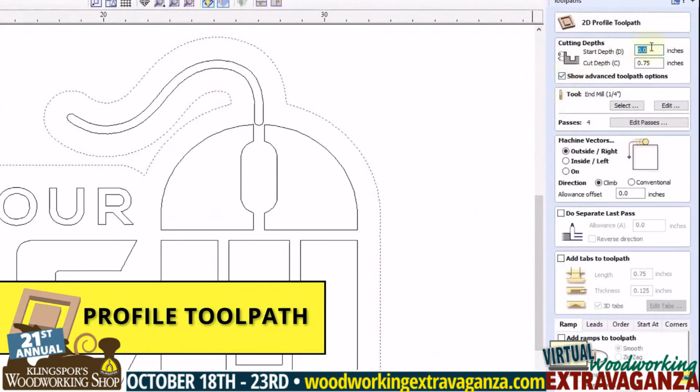So the start depth is once again going to be 0 inches, so we start off at the surface of the material. The cut depth is going to be going through the entire material. Now, if you remember, we're just over 3/4 of an inch. So an easy way to figure that out, if you don't remember the thickness of your material, you can do the letter Z for the Z axis, which is the height, or you could do the letter T for thickness and then type in the equal sign.

That's going to automatically take the number that we set up in the job setup and enter that right here. And that was 0.775. So now that's going to cut all the way through our material.

Next we have to select the tool that we want to use. We can go select a tool, but I'm going to try the 1/4 inch end mill that we used in the previous toolpath. So I'm going to do that one and click select. You can see that's going to do 7 passes through our material.

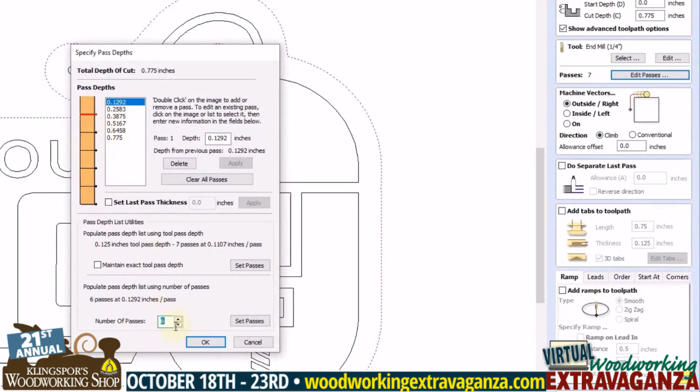If you do edit passes, you could see all the different passes it's going to do through the thickness of our material, and you can adjust these passes in here. You can set a last pass thickness if you wanted to, or you can do a number down here. Let's say we bumped it down to 6, and you'll see they'll automatically adjust up here. So now it will do 6 passes instead of 7. And when you click OK, it will adjust the number here.

Once again, you want to make sure your tool and machine could handle those passes. So it's better to start off with more passes at a minimal depth and then work your way up when you get more comfortable with your machine. All right, now we have our tool set up.

We need to know where we want to machine this line. We can go on the outside of the line, on the inside of the line, or directly on top of the line. In this case, we want to keep the shape in the middle, so we want to cut on the outside of the line. That way it keeps that shape the exact size that we have set here. So we're going to select outside, and there's more settings we can do down here.

One thing you may want to do is add tabs. This will add little pieces of material left behind to hold the shape in place so it does not break free since we're cutting all the way through the material. But I'm going to be using the tape and super glue method to hold down the material, so I'm not going to use tabs in this case. You'll see that when we go to machine this.

But I am, however, going to add some ramps again. So we're going to click add ramps, and I'm going to do a smooth ramp with a 1/2 inch distance again. That's just going to put a little less stress on the tool as it enters into the material. There's more settings we can set up in here, but we're not going to get into too many of those in this lesson.

So down here, we can go to the name of this. We're going to do profile, 1/4 inch end mill. We have our vector selected on the profile there. So we're going to click calculate.

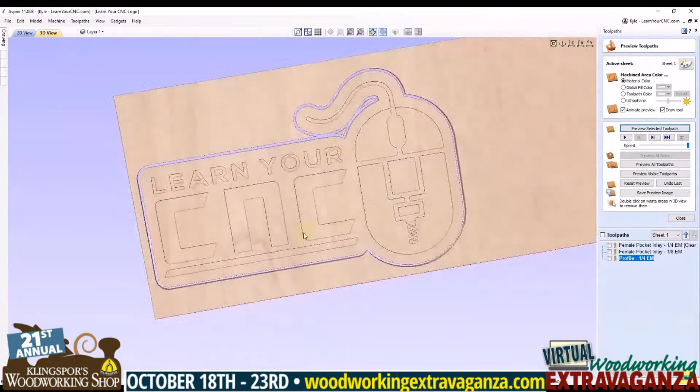Once you cut this out, you can double click on these little pieces in here to remove them, as well as this large piece out here. Double click on it, and now you can see what we're left with. This is exactly what our piece will look like when we carve the first one here.

We can even change the material up here, and we could drop this down and go to MDF. So now we can see what MDF would look like carved like this.

Okay, so this piece is looking pretty good. I'm going to say we're good on this, so I'm going to click close. And one thing I'm going to do is go to file and save, so we have all of our changes that we just made saved to our current file.

And if we really wanted to, you can stop it just like this. You can carve these pockets and paint inside these pockets whatever color you wanted, and paint the surface whatever color you wanted, and this sign would look pretty good just the way it is. But we're going to go for the more three-dimensional look by making the inlay inserts, so we're going to have to carve our 1/2 inch piece of material to fit into these pockets.

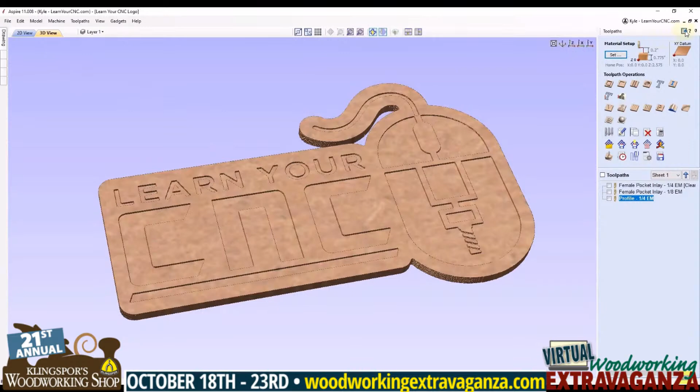To do that, we have to make a new piece of material as well as new toolpaths for our shapes. In previous versions of Vectric, you would have to create a whole new file to do that. But now in version 11, we can go back to our drawing tab, and on the left side here we have a new tab called Sheets.

In here, you can add multiple size sheets within one file, which makes it very handy to create files like this, where we have two different pieces of material we want to carve for one project. Right now we have sheet number 1, which, if we go to our 2D view, is this sheet in white. That is 58.5 inches long, 22 3/4 tall, and 0.775 inches in thickness. We're going to edit the name by right-clicking, going to rename, and we'll name this one 3/4 inch MDF.

So that's our first sheet. We're going to add a new sheet for our 1/2 inch MDF by coming down here to the bottom and clicking Add New. You can see a new sheet appears inside of our sheet list, and if we zoom out, it appears over here on the left. The name of the sheet is down at the bottom. So we have 3/4 inch MDF, and right now it says sheet 2. We're going to change that to 1/2 inch MDF.

Now that name changed on the screen here. But if you remember, we measured this piece of material and it's different from the size of the 3/4 inch sheet. So we're going to select that new sheet, right click on it, and go to Edit. That's going to bring us into the same thing we looked at in the job setup, so we'll be able to adjust the size of the material and where we want to zero the Z, X, and Y. So we can change different settings within multiple sheets inside of one project.

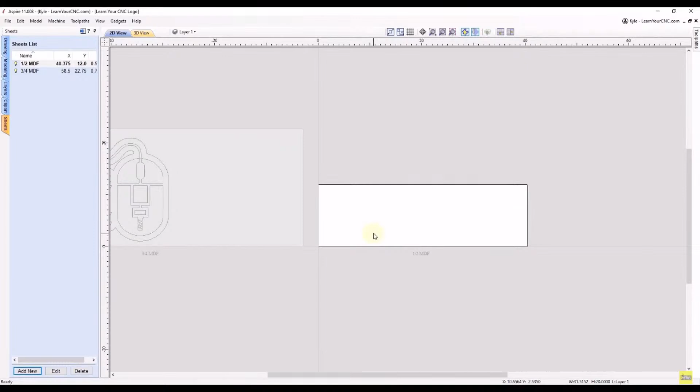You can see in our sheet list we now have the updated measurements here. If we zoom out, we can see our original sheet over here, the 3/4 inch MDF, and our new sheet, the 1/2 inch MDF. So now whatever we design and create toolpaths for on this sheet will only be for the 1/2 inch MDF, and whatever we do on this other sheet is only for the 3/4 inch MDF.

All right, so let's go back to our drawing tab. You can see we don't have anything on this sheet, so first we need some vectors to work with. We're going to go back to our original sheet by double clicking on it, which makes that sheet active.

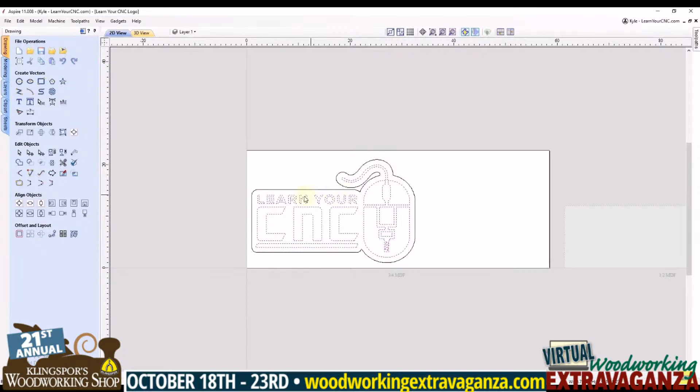We want all the vectors on the inside here to be copied over to our new sheet, because we want them exactly the same size so we know they'll fit perfectly within the pockets. We're going to select all these by drawing a selection box around them, then hold our Shift key and deselect the outer shape, since that's the one we don't need. Now with all the shapes selected, we'll right click, go down to Copy to Sheet, and copy it to the MDF sheet.

When you click that, it'll move over here to the MDF sheet. Now we can double click on this MDF sheet to edit it, and you can see we have the vectors over here, the exact same size and position they were in the previous sheet. The only thing is they are now outside of the sheet because the sheet is smaller. So now we're going to see if we can fit all these shapes within this sheet.

These shapes don't have to be in the exact same position they are right now, because these are going to be all individual cutouts that we're going to glue into the pockets later. So it doesn't matter where these parts are exactly located. We can either take these shapes, select the ones we want to move, and manually position them within the sheet. You can see if we do this pretty quickly, we can just move these around and probably get these to fit fairly easily, just like this. You can get all those shapes inside there, and cut this just like this, and it'll be perfectly fine.

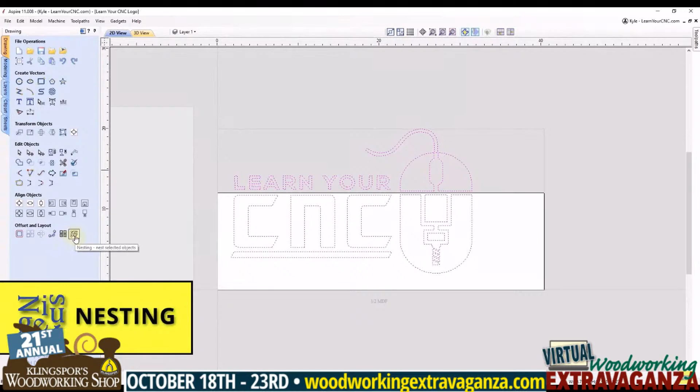Another thing you could do, if we undo to bring those back to where they were, is select all of the shapes - there's a tool called nesting down at the bottom. This won't be available in the desktop versions, but it will be available in the Pro versions and Aspire. If we click on nesting, you can set the tool diameter, which is going to be the smallest tool that we use to cut out the pocket, and that is the 1/8 inch tool.

So we'll type in 0.125. Then you can add a clearance between the parts - I like to go about 1/16 of an inch extra clearance. You can certainly do larger if you wanted, but I go with 1/16 to get the maximum usage of the material. Then we could do a border gap around the edges, which is if you're using clamps or something on the edge that you want to stay away from. You can add an extra border gap there to give you room for clamps or whatever you want to use on the edge. Let's try leaving it at 1/4 inch.

Then we can rotate the parts to find best fitment. If you want the absolute best fitment, you can go down to a very low angle, like 1 degree, and that will position these the best way it can to fit inside here. If you're concerned about grain direction or something, if you're using solid wood, you may not want to rotate the parts, so you can turn this option off if you want the grain going in the same direction. Another thing you could do is mirror the parts to find best fitment, but if you do that, the finished surface will now be at the bottom instead of the top. So that may be a concern depending on what kind of material you're using. In this case, we're using MDF, so it would be okay to use that.

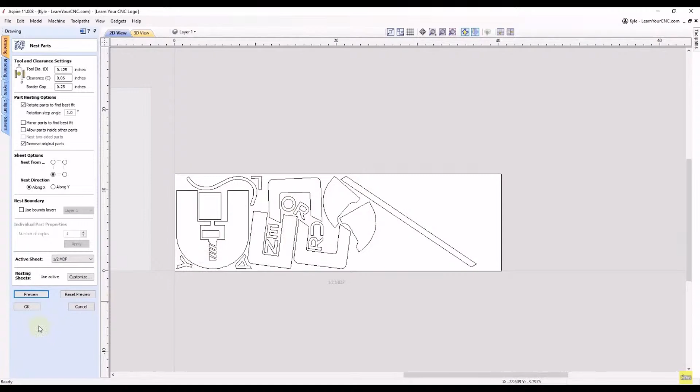So we're going to come down here and click preview. You can see it fit all those parts inside here according to the settings we set up, and they are spaced far enough away for the tool to fit inside there. This may be a little bit different than you would set up manually, but this is a very quick way to get the maximum usage out of your material. Of course, you can further edit this afterwards if you wanted to. So if we're happy with this, we can click OK. Now we would be ready to create our toolpaths.

So what we're going to do is go to our toolpath tab, click on it, and click the little pin at the top, and that'll pin it in here as well as looking at our drawing tab at the same time. So if we have to go back and forth, we can look at both at once.

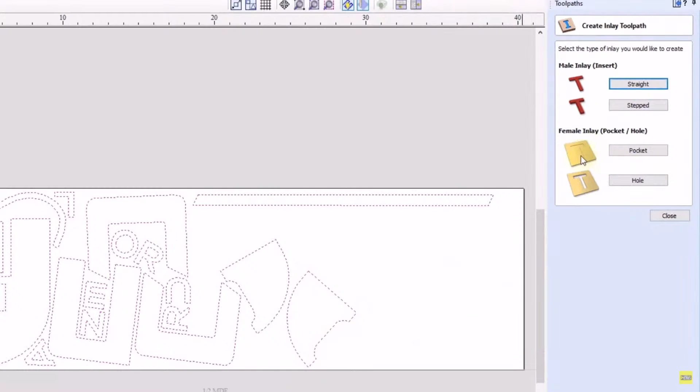We're going to select all these shapes and use the inlay toolpath again. Before we did the female inlay pocket, so this time we're going to do the male inlay insert. We have two options: a straight insert, which just cuts straight along these lines, or a stepped insert, which creates a little rabbet around the edges to overlap the pocket. That way, if you had a gap that wasn't a perfect fit, that rabbet will cover the gaps. But in this case, we're going to do the straight inlay.

So we'll select that. Once again, we're going to do a start depth of 0 since we're starting at our surface, and our cut depth is going to go all the way through our 1/2 inch material this time. If we don't remember our thickness, we can type the letter T, then the equal sign, and that'll automatically insert the thickness for this material, which is 0.516, as entered in our material setup.

And then here's a very important step: we have to use the exact same tool that we used for the female inlay, which was the smaller 1/8 inch tool that goes all the way around the edge. The reason you want to use the exact same tool is because the radius corners have to match up with the male inlay inserts. So we'll go to select, choose the 1/8 inch end mill, the same one we used before, and click select.

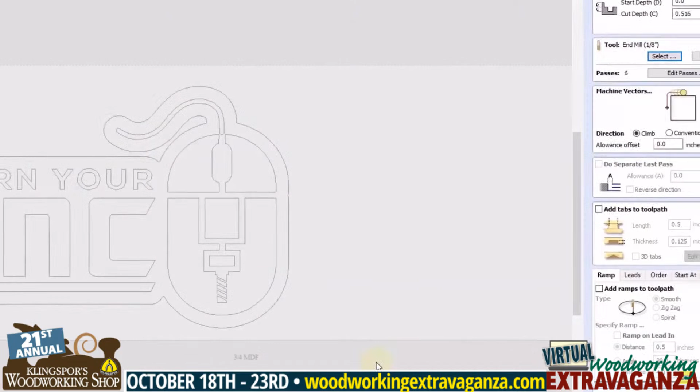This is why I said beware of using a very small tool, because if you went down to a 1/16 or even a 32nd inch tool, you'd have to cut all these shapes out with that tool. So I try not to go much smaller than 1/8 of an inch, depending on the project.

So we're going to use our 1/8 inch end mill. We can edit the passes if we wanted to, but this looks pretty safe for this tool, so I'll click OK. And this one's going to automatically machine on the outside of the vectors, so you don't have to select where you want to machine them.

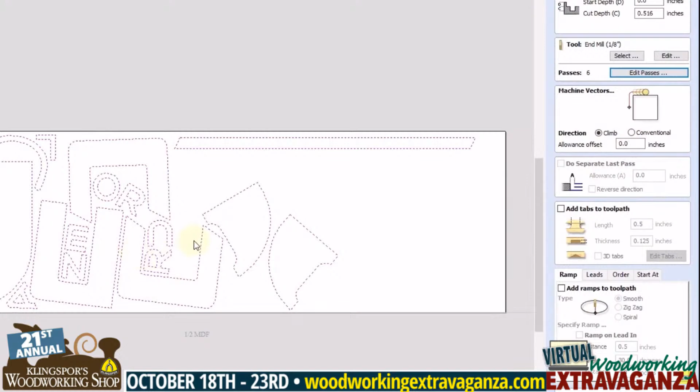There's an allowance offset in here. If you were to cut the pocket first and then cut these out, you could adjust that allowance offset bigger or smaller to make these parts fit inside the pocket. But I like to cut these shapes first with a 0 allowance offset, then cut the pocket second while still on the machine, and try to fit these pieces in, adjusting the pocket if necessary while it's still loaded. So we're going to cut these parts first with a 0 allowance offset.

For these small pieces, you may want to add some tabs, but I'm going to use no tabs, and instead use the tape and superglue method to hold these parts in place. If I wasn't using that method, I'd probably use tabs since these parts are pretty small, but I personally prefer the tape and superglue method so you don't have to clean up all those tabs afterwards.

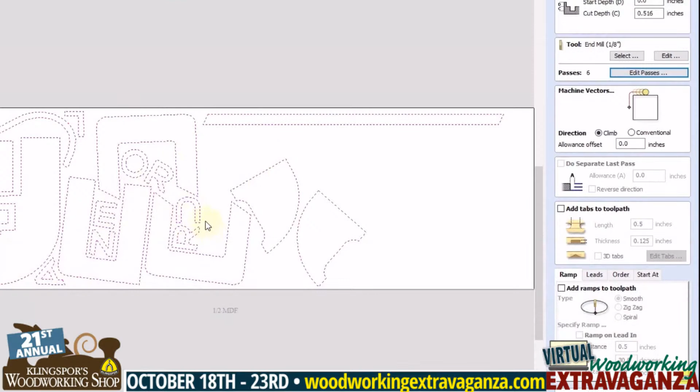Next we're going to add a ramp again, going with a 1/4 inch distance since we're using the 1/8 inch tool. Then we can set the order we want to cut all these parts, so we'll do the shortest path, which optimizes to go the shortest distance between the vectors. Lastly, we can set the start at position, and I'll optimize the start points to wherever is closest to the last shape.

With this all set up, we'll give it a name down here: male inlay 1/8 inch end mill, and click calculate. Okay, and there you go—we see we have our toolpath created. So let's click preview selected toolpath.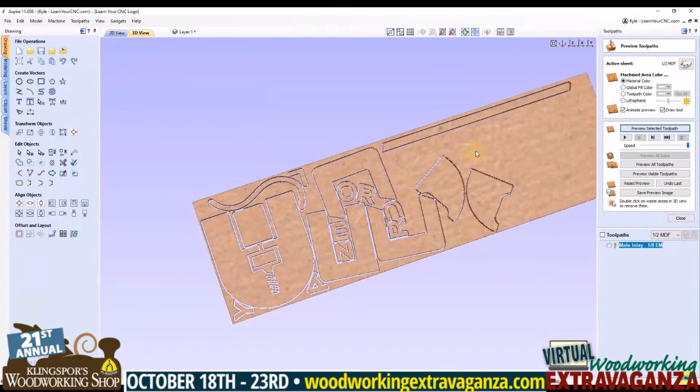You'll see that will cut through all of the material there, and it will cut out every shape there. Then we can double click on the waste to remove it in our preview, so we can get an idea of what all these shapes would look like. Go through and double click on all that waste just to remove it, and these are the shapes we'll be left with.

We can also see in our 2D view, if we turn on the visibility of this toolpath, and we're in our solid view again, we'll zoom in, and you'll see any of these sharp corners, it's going to cut them off because it's going to match that radius that it cut in the female pockets. If you remember that R we looked at, it cut away this corner in the female inlay because in the male inlay part, it could not reach inside there.

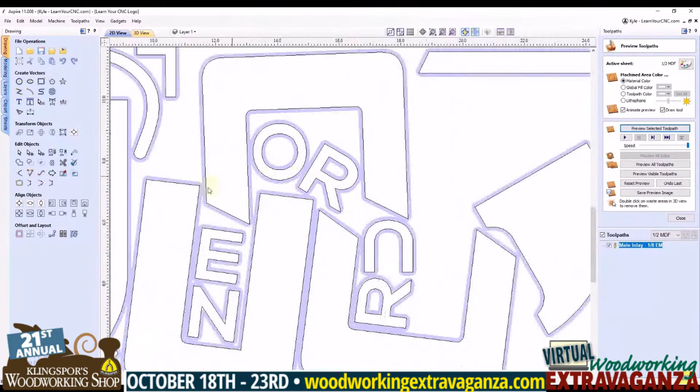So it automatically calculates for that, so now they're going to match up perfectly when we go to fit them inside of each other without any filing or chiseling in any of the corners. That's the only toolpath we have to make for this 1/2 inch MDF.

Now we're ready to go with our machining. But if you remember, like I mentioned earlier, we first want to rotate these 90 degrees to fit within our machine, because right now my particular machine will not fit a board this wide. So I could either cut this down manually to make it fit, or I can rotate the sheet and the design to fit within my machine. I would have to do that anyways for the 1/2 inch material, so I'm just going to do it for both pieces. First, before we do that, let's save our project again, just so we don't lose anything.

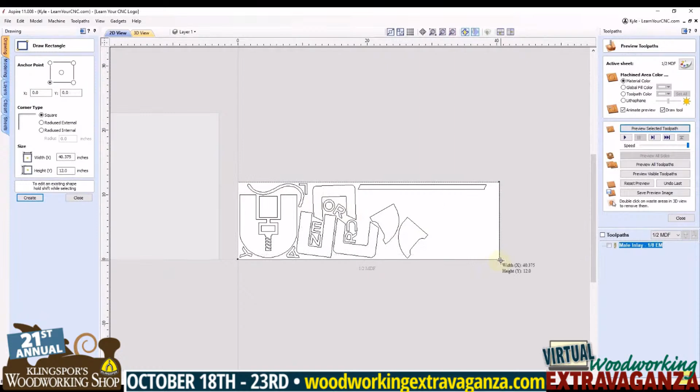We're already on the 1/2 inch piece of material. First, what I'm going to do is draw a rectangle around our piece of material so I know exactly where to place it when I rotate it. We're going to go to Draw Rectangle, and I'm going to snap in this upper left-hand corner and then drag it down and snap to this bottom right-hand corner. Now we have a rectangle around our piece of material, so now we're going to click Close, and then go to our Sheet tab.

We're going to go to the 1/2 inch MDF, right click on that and click Edit. Now we're just going to switch the width and the height, so we're going to type in 12 up here, and we're going to type in 40 3/8 down here. Now you can see that's rotated 90 degrees, it's longer in the height and shorter in the width. So we're going to click OK.

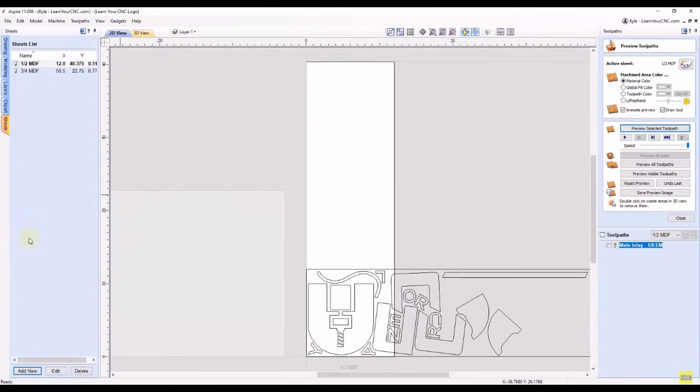Now you can see our shapes no longer fit in this height, so now we have to rotate those. I'm going to select all of these shapes, including that rectangle that we just drew. We can either go back to our drawing tab and go to our rotate tool, or even easier than that, we can use keyboard shortcuts, and that is either the number 9 or the number 0. So with these objects selected, if you type in the number 9, you'll see it will rotate counterclockwise 45 degrees, and if you type it one more time, it'll go another 45 degrees, and now it will be 90 degrees rotated from the original position.

So now with this rotated properly, we just need to center it inside of our material. A quick way to do that is on your keyboard, the shortcut is F9, and when you click that, that'll go exactly center of your material. Now we no longer need this outside rectangle, so we can select that and click Delete. Now we have that entire design and material flipped 90 degrees from the original layout.

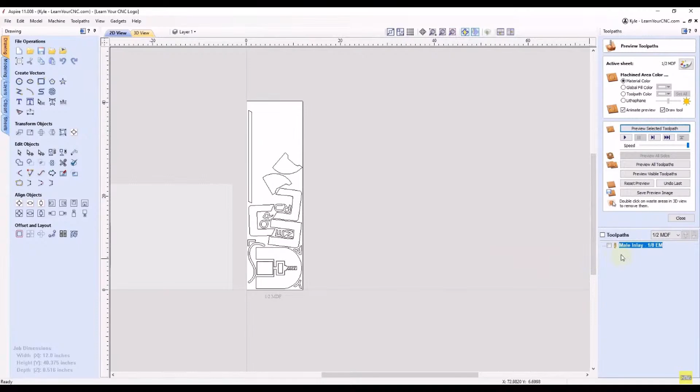But one thing to be aware of is if we turn on the visibility of our toolpath, you can see it's still the original way that it was before. Even in the 3D view, you could see it's now still horizontal, and we flipped everything vertical, so we have to adjust that as well. We can either do that right now, or we can go back and adjust the other sheet first, and then we can do all of them at the same time. So let's do that - we're going to deselect this toolpath.

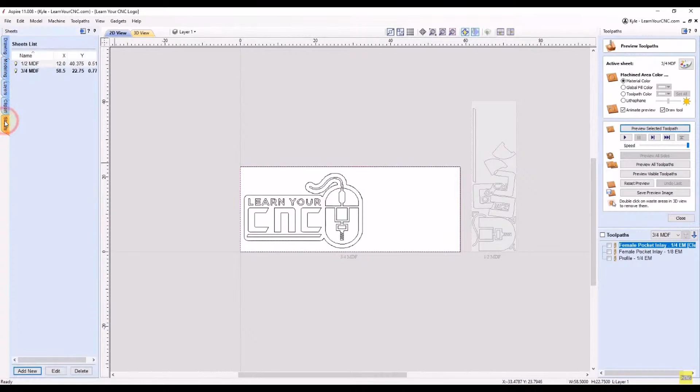We're going to double click on our 3/4 inch MDF sheet, and we're going to do the same process. We're going to go to the rectangle tool, snap to each corner and then click close. Then we are going to go to our sheet tab, right click on the 3/4 inch MDF, click edit, and we're just going to switch these numbers. So this will be 22 3/4, and this one will be 58 1/2.

Everything else stays the same, so we're going to click OK. Now we're going to select the rectangle and our design and click the number 9 key two times. That rotated it 90 degrees. Then we just need to center it by clicking the F9 key on our keyboard, and now it's nice and centered in our material.

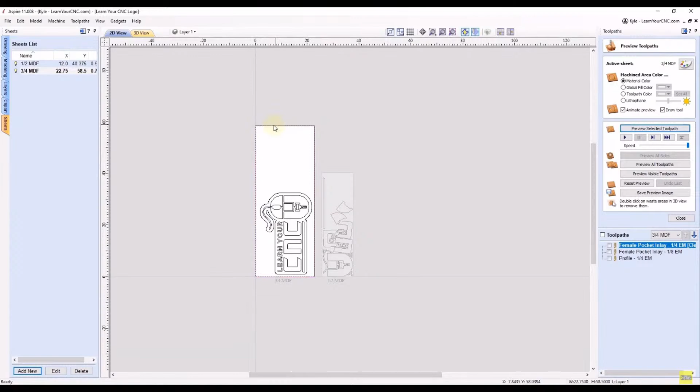Now we can select that rectangle and click delete, and we can zoom in. One thing to note is now it's 1 inch from this right side instead of 1 inch from the left side. So if you wanted to adjust that, you can select the design, click the letter M on your keyboard. That's a shortcut to go to the move tool.

We can anchor in the lower left position again and just adjust the X measurement to 1 inch, click apply. Now we're 1 inch from this left side over here, which is from our origin point in the lower left corner. Okay, so let's click close.

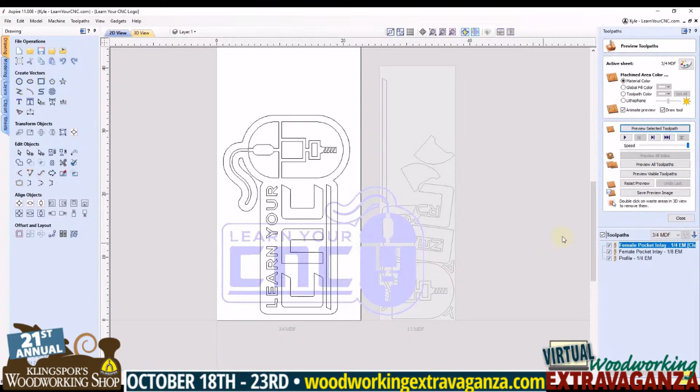Once again, if we turn on the visibility of these toolpaths, they're still horizontal in the original location that they were before. So now we just have to recalculate all of our toolpaths.

And there's a quick way to do that. You could close this preview, and there's a button right here in your toolpath tab that says recalculate all toolpaths. You can also right click on individual toolpaths, come down to recalculate, and you can either recalculate just one, recalculate all the visible ones, or recalculate all.

So let's click recalculate all, and it'll tell you that it did it successfully. So click OK. And now you can see the toolpath is now recalculated to our new position.

And we can go to the 1/2 inch MDF sheet, turn on the visibility of that one, and you can see this one has adjusted as well. So now we're all good to go. Everything should be correct now. So now we can save it one last time, and now our project is complete.

Okay, so now that we have our project finished and our toolpath saved, we're going to head out to the shop and start machining this.